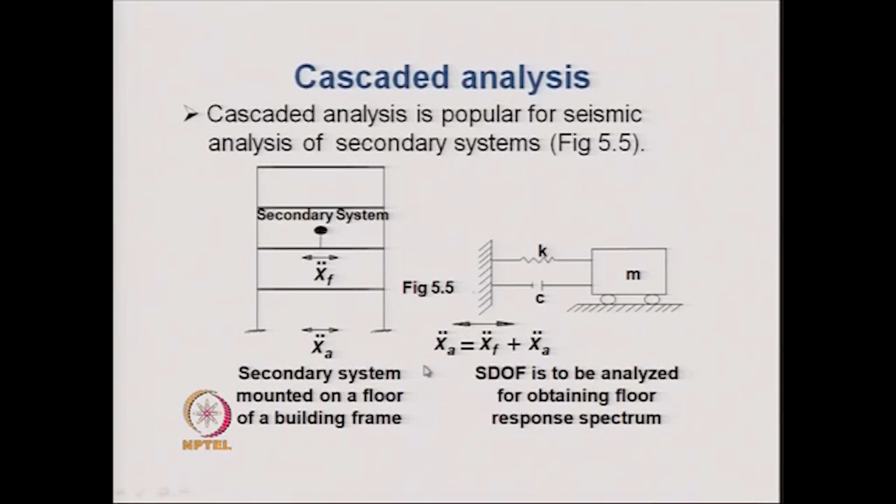So what is done is that first we remove the secondary system from the primary system, only retaining the mass of the secondary system attached to the primary system. We analyze it for the given ground acceleration, and the results of the analysis provide the time history of the acceleration at the floor level.

To this time history of acceleration, we add the ground time history of acceleration to obtain the absolute time history of the absolute acceleration. This time history of absolute acceleration then becomes input for the piping system, which is mounted on the floor.

We assume that the piping systems are attached to the floor in a way that one can assume the ends or supports of the piping system to be fixed. Thus, for a fixed end support, the acceleration at that support is the absolute acceleration of the floor.

By knowing the time history of the absolute acceleration of the floor, one can find out the response spectrum of the floor for the given absolute acceleration time history. So first the floor response spectrum is obtained from that time history, and once we get the response spectrum for the absolute acceleration, that response spectrum is inputted at the base of the piping system, and we carry out the usual response spectrum method of analysis that we have discussed.

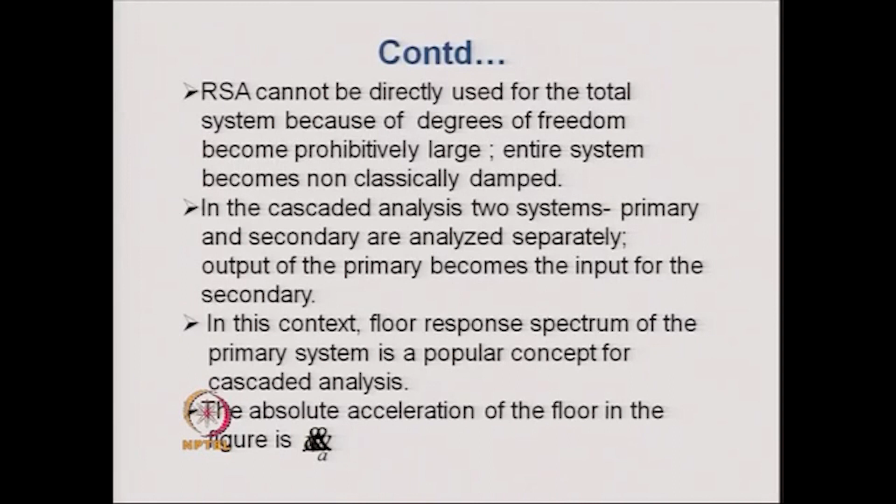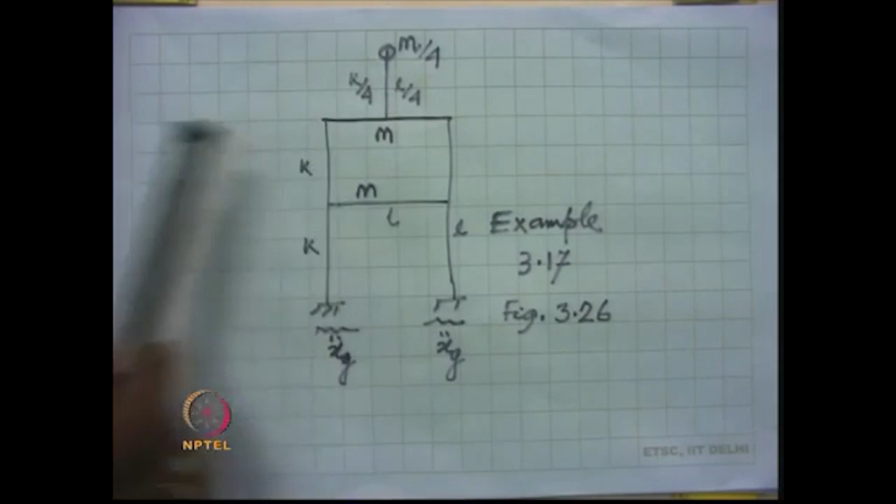An example problem is solved here to illustrate the use of the response spectrum method of analysis for secondary system. This is a building frame. In this building frame, we have a secondary system. The secondary system has a mass m by 4 and it has a length L by 4.

The stiffness is K by 4, whereas the main building has a stiffness of K, and this is the mass of the second floor. Damping for the secondary system is 2%, damping for the primary system is 5%.

This is an exercise problem given in chapter 3, that is the response analysis for the deterministic ground motion. In that chapter, this problem is given as an exercise problem to solve.

Now, for this system, for the specified ground acceleration, here the specified ground acceleration is taken as the El Centro ground excitation.

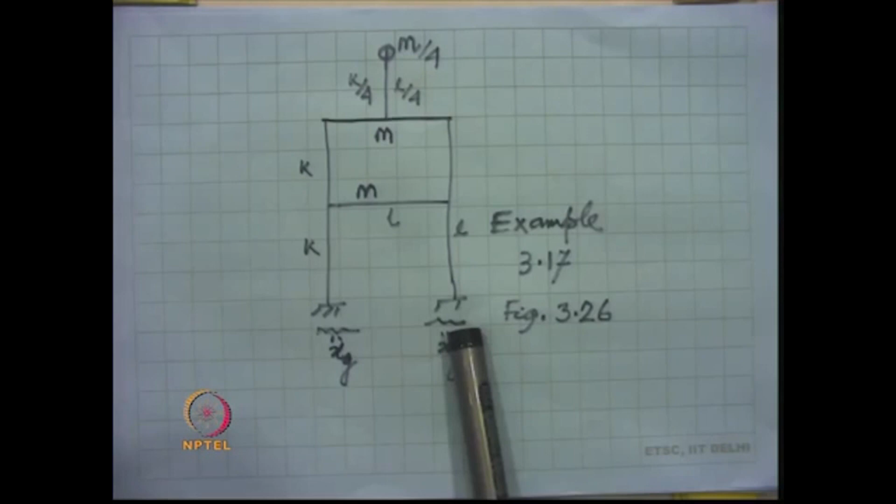We perform a time history analysis. We can perform the time history analysis either in the time domain or in the frequency domain, and find out the time history of the absolute acceleration for the top floor level.

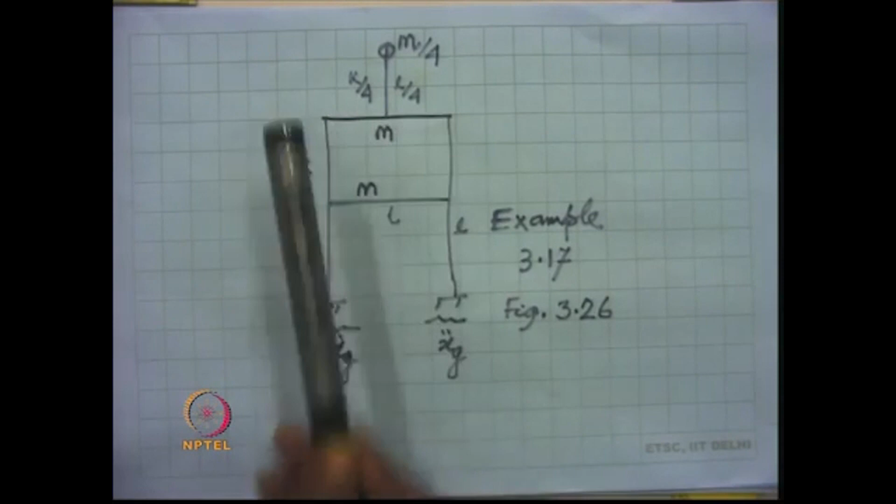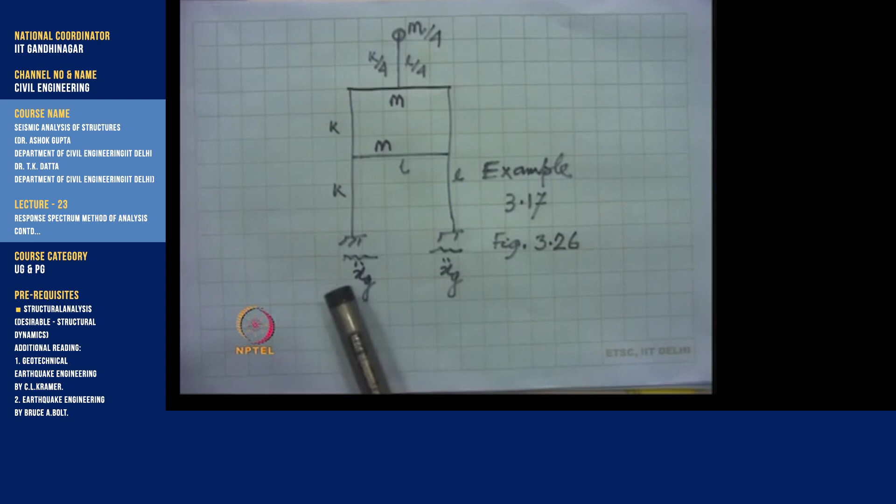And for that, first we find out the time history of the relative acceleration of the top floor, that is the relative acceleration with respect to the base, and to that we add the time history of the ground acceleration. So that provides a time history of the absolute acceleration of the top floor.

Then for that time history of absolute acceleration, we obtain a corresponding response spectrum of acceleration. How to obtain the response spectrum of acceleration, that we had discussed before, that is, we take a single degree of freedom system. The base or the support of the single degree of freedom system is subjected to the time history of the absolute acceleration that we have obtained.

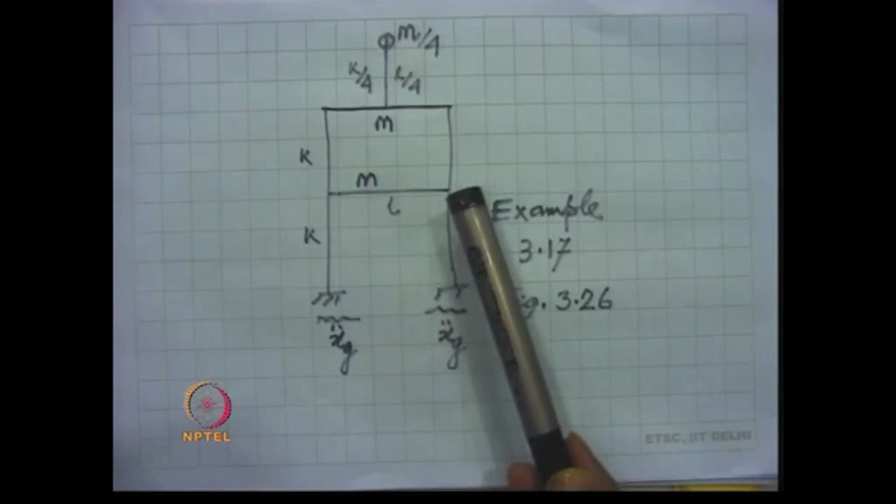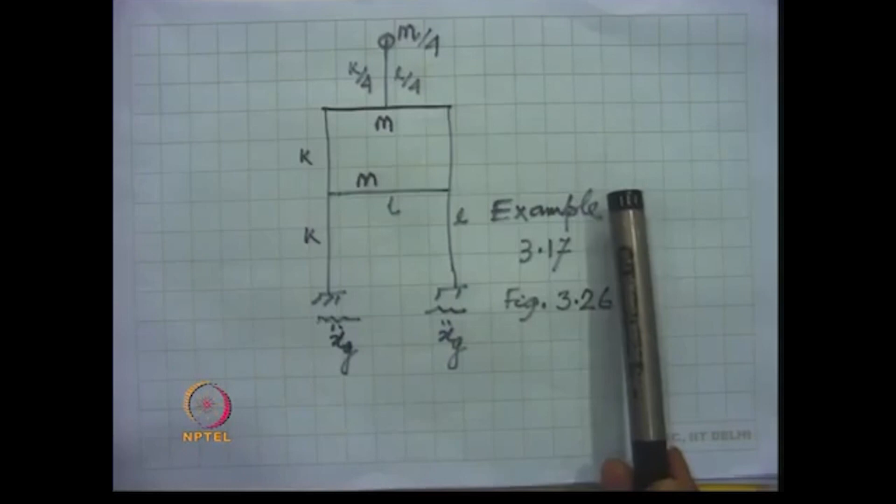Then for different frequencies for the single degree of freedom system, that is, by varying k and m, we can have different frequencies and corresponding different time periods. For that we can obtain the displacement response spectrum first. Then from the displacement response spectrum we derive the pseudo velocity spectrum, and from that we can derive the pseudo acceleration spectrum, or the acceleration spectrum that we generally use.

These response spectrums are obtained for the required damping, and in this case the damping is 2%, because the secondary system has a damping of 2%.

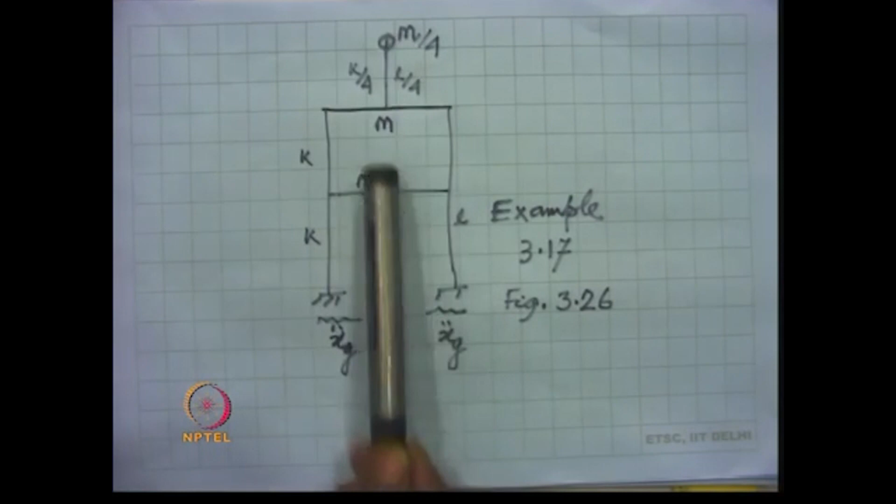So once we have the response spectrum of acceleration for 2% damping, then for this secondary system an excitation record acts at the base of the support, whose response spectrum is now known. Therefore the time period for this secondary system can be worked out with the help of the stiffness and the mass.

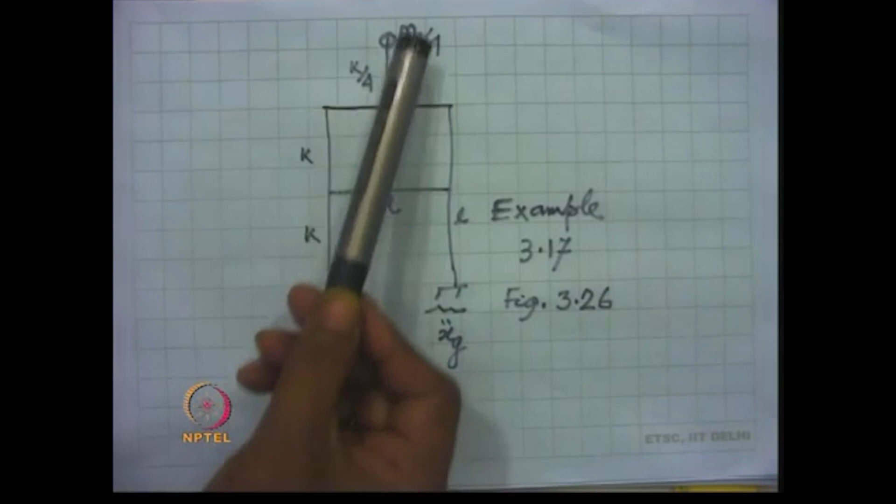Once we know the frequency of the secondary system, from that we can get the corresponding time period, and for that time period one can obtain the acceleration spectrum ordinate, and using that acceleration spectrum ordinate we can obtain the force that would be acting on this system.

Since it is a single degree of freedom system, we need to consider only one mode, so there will be only one static force acting onto the secondary system, and we can find out the bending moment, shear force, and the top displacement of the secondary system.

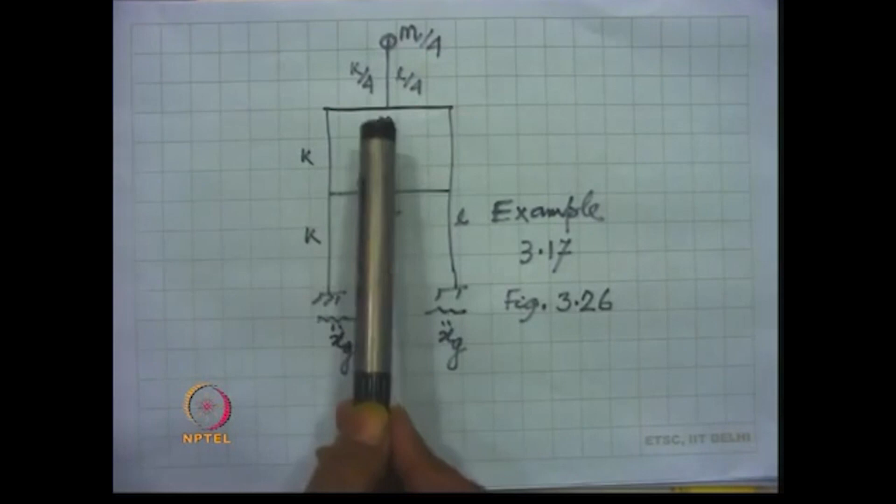This problem is made easy by providing only a 1 degree of freedom system. However, one can have a structure which is not a single degree of freedom system like this.

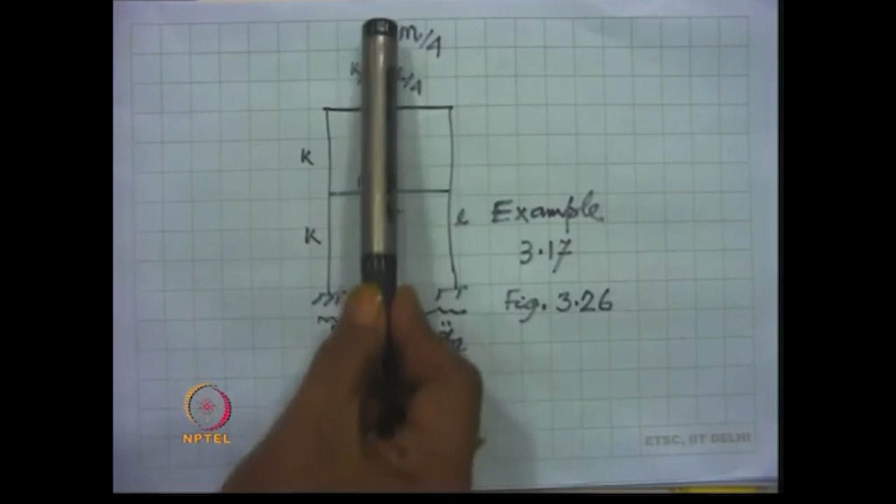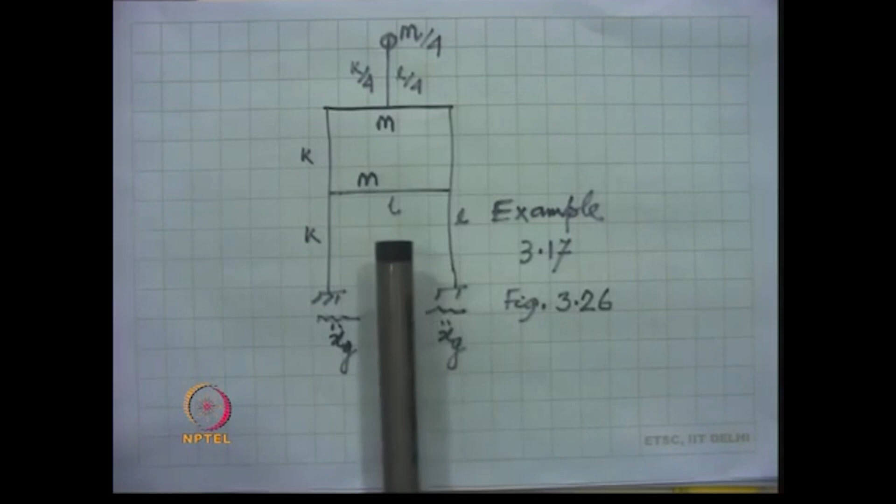In fact, there could be a piping system in which there could be 2, 3, or 4 supports, and in that case at all the supports we can assume that the same time history of absolute acceleration would be acting, for which the response spectrum we have obtained, and then carry out the usual response spectrum method of analysis for the piping system.

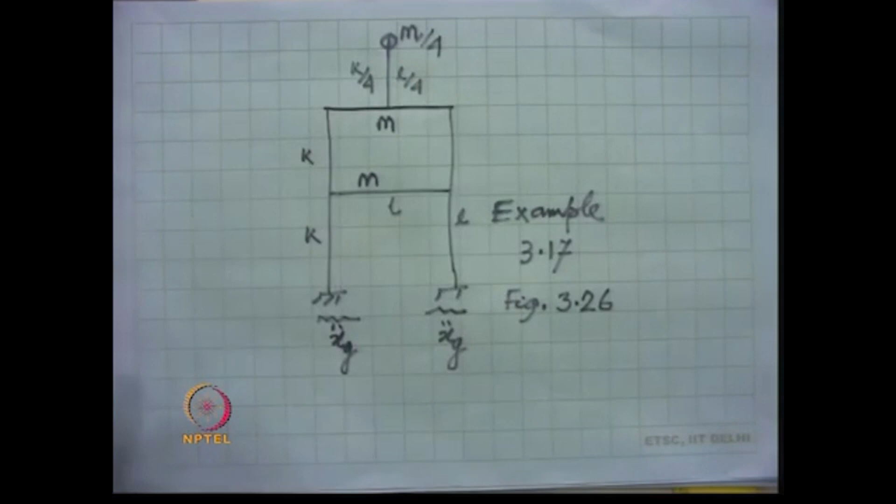The result for this problem is shown here. The time period of the secondary system was obtained as 0.811 second. The displacement, or floor displacement, response spectrum is given over here.

We can multiply the floor displacement response spectrum with omega square in order to get the pseudo acceleration response spectrum. Once we get the pseudo acceleration spectrum, then corresponding to this time period of 0.811 second, one can obtain the value of the spectral acceleration and multiply that spectral acceleration with the mass.

That would give the force acting on the top of the cantilever, resulting in a lateral displacement at the top and the corresponding base shear. The result that we obtained from the cascaded analysis was...

0.8635 meter as the deflection of the top of the cantilever, whereas a proper time history analysis for the entire structure, considering the secondary system included into the entire structure, makes it a composite primary-secondary system. We call it a PS system.

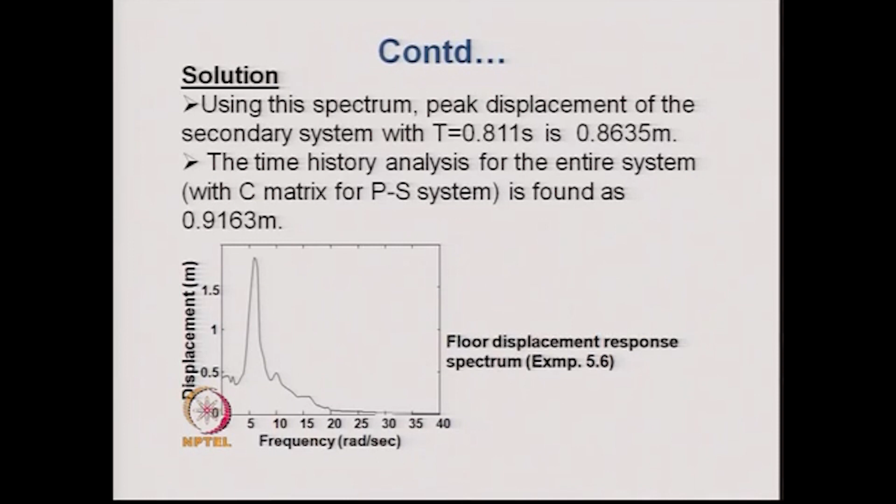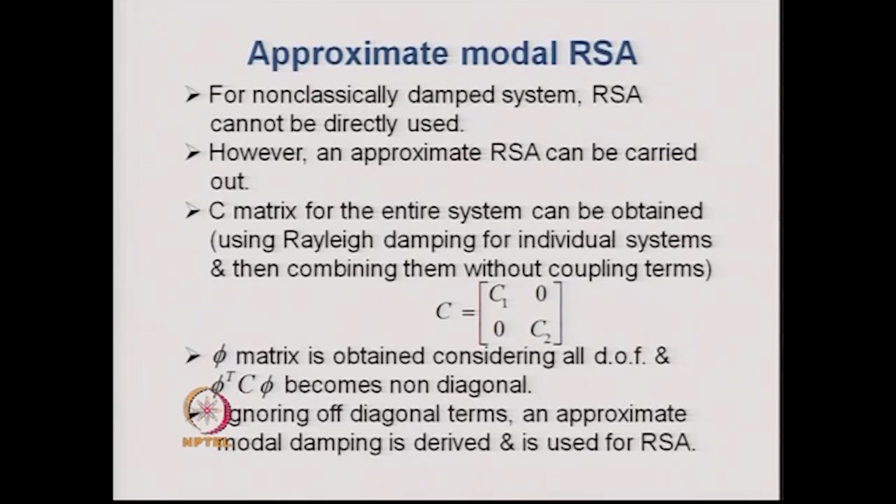Next, we consider the application of the response spectrum method of analysis for non-classically damped systems. The non-classically damped systems are ones in which we have a system like this, in which there is a main system, and in that main system, say we have a tower. Then this tower may be made of steel, this building is made of concrete—both of them have different damping.

So the construction of the C matrix for the composite system is to be obtained first. In this case, the C matrix is obtained by first obtaining the damping matrix for the primary structure, and separately obtaining the damping matrix for the secondary system.

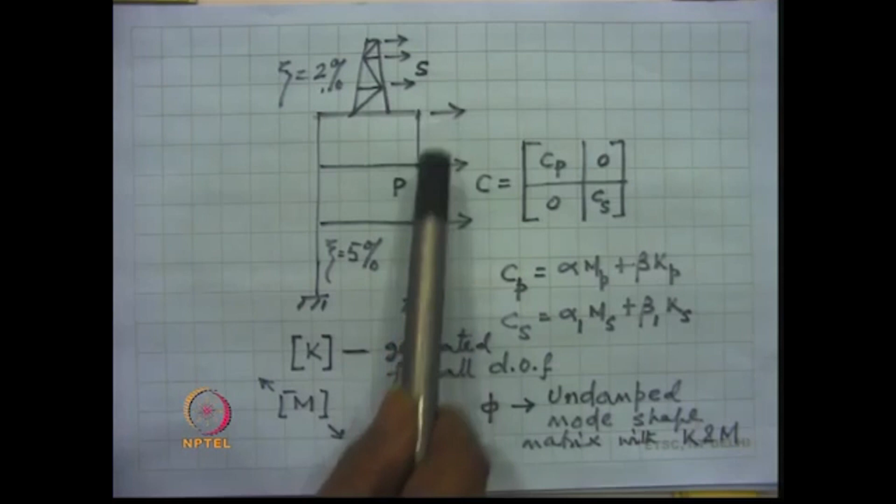Here say the main structure has 3 degrees of freedom. So we obtain the damping matrix corresponding to these 3 degrees of freedom by assuming it to be mass and stiffness proportional. So we first find out the frequencies of the primary system, and in that we completely decouple the secondary system. So from that we get the damping matrix after obtaining the values of alpha and beta.

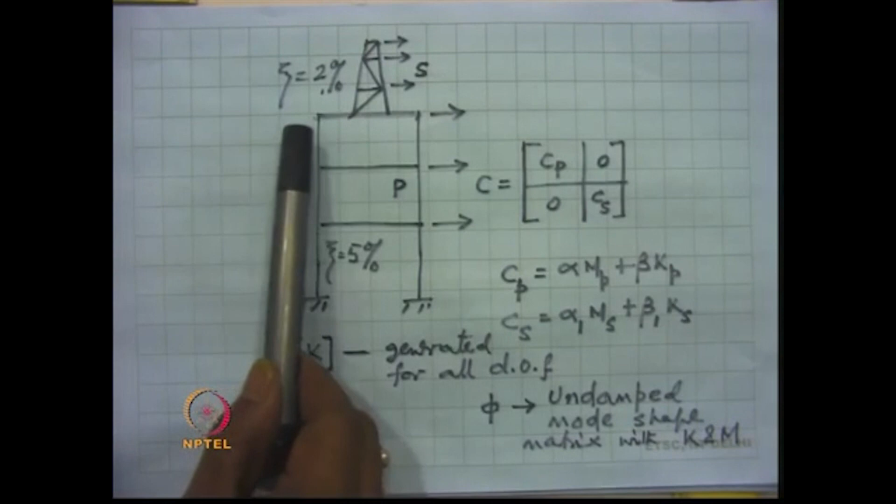Once we get this damping matrix for the primary system, we put it over here, and it will be a 3 by 3 matrix. Similarly, one can obtain the damping matrix for the secondary system, say it is also having 3 degrees of freedom. So using a modal damping ratio of 2%, we construct the CS matrix in the same fashion as we have done for the primary system, and this CS is the damping matrix for the secondary system.

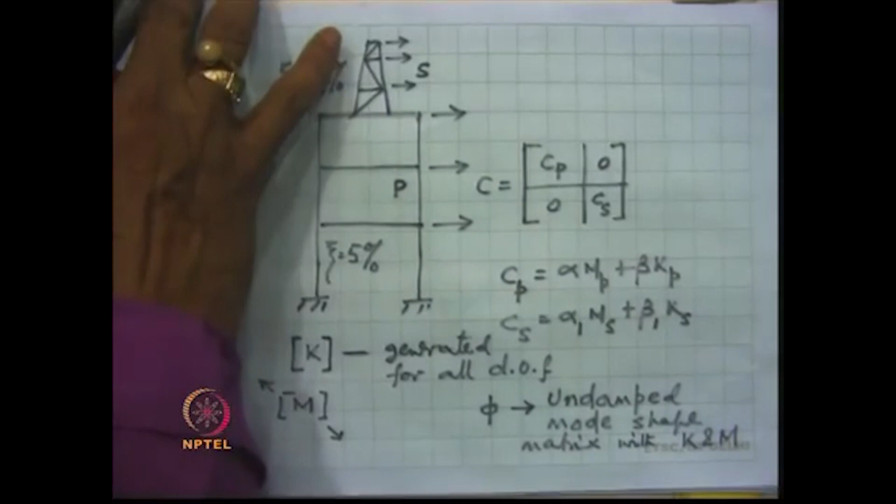The coupling between the primary system and the secondary system, that we set to 0 because that is not explicitly known. That is how one can construct a C matrix, and this C matrix is non-classically damped because we have got 2 types of damping in the system.

Once we get the damping matrix for the entire system, one can consider the entire system together, a system of 6 degrees of freedom. We write down the stiffness matrix corresponding to these 6 degrees of freedom, that becomes the K matrix. The mass matrix becomes a diagonal mass matrix having 6 masses. With the help of this mass matrix and stiffness matrix, we obtain the undamped mode shapes and frequencies with the help of K and M.

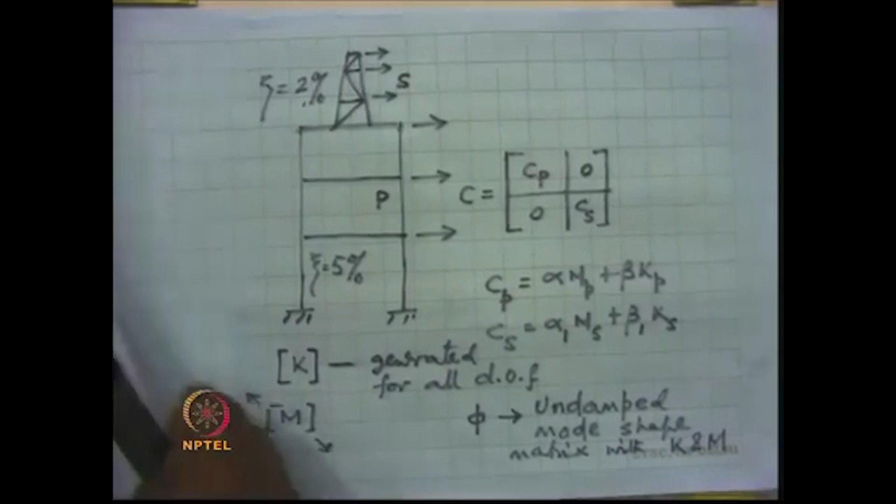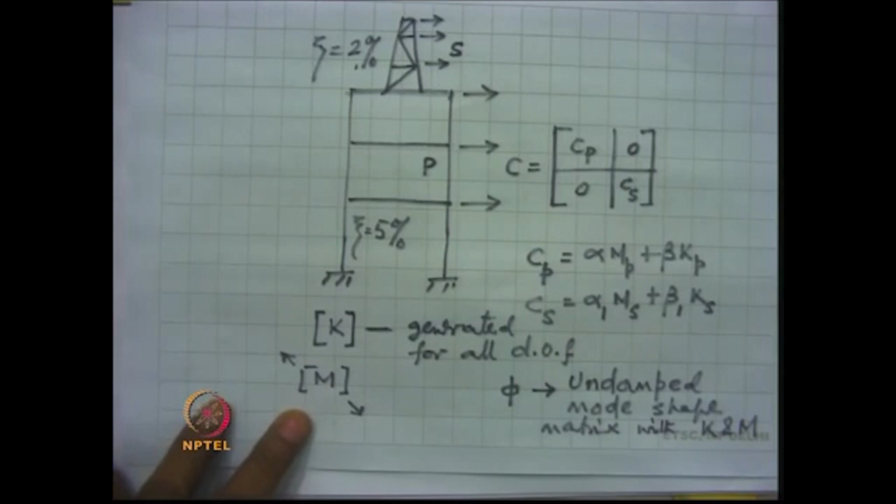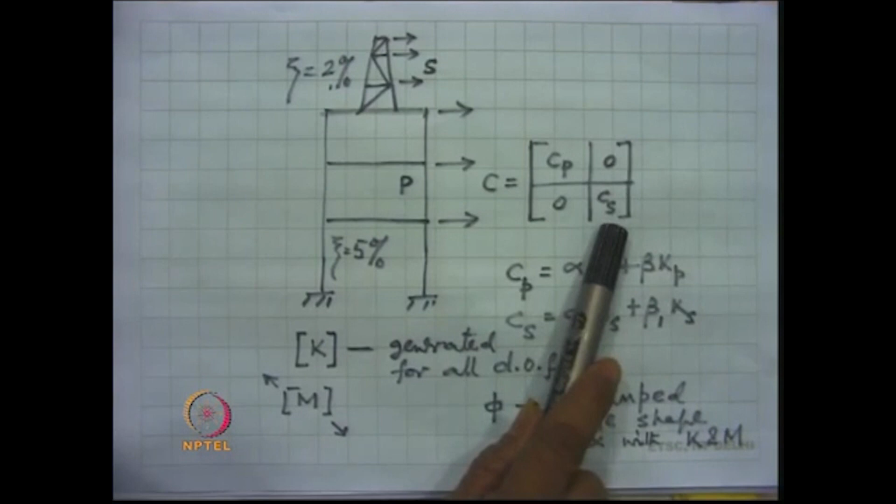Once we get these undamped frequencies and mode shapes, one can use decoupling, trying to decouple the equation of motion by writing phi transpose C phi, phi transpose K phi, and phi transpose M phi, which of course will be diagonal. Phi transpose C phi will not become a diagonal matrix. Note that the phi matrix will be 6 by 6, and since it is non-classically damped, phi transpose C phi will not be diagonal, there will be off-diagonal terms.

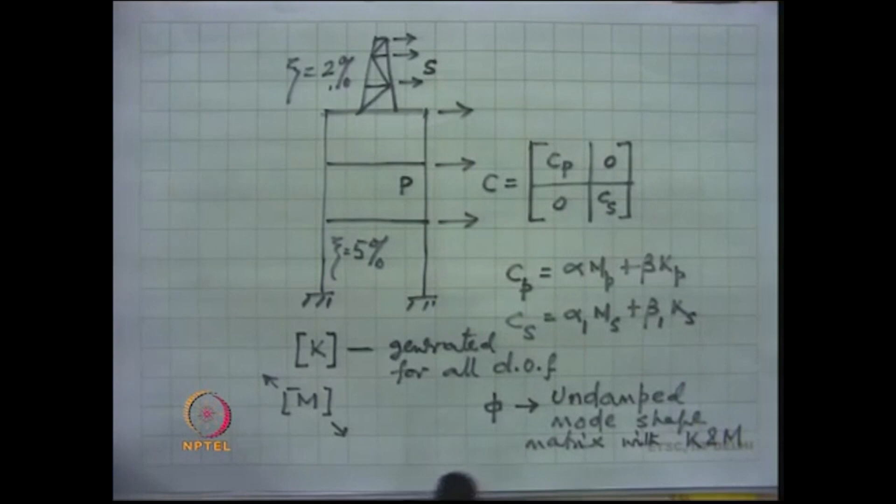By ignoring the off-diagonal terms, that is by diagonalizing the phi transpose C phi matrix, one can decouple the entire equation of motion, and from the diagonal terms of the damping matrix, one can obtain the modal damping ratios in each mode of vibration.

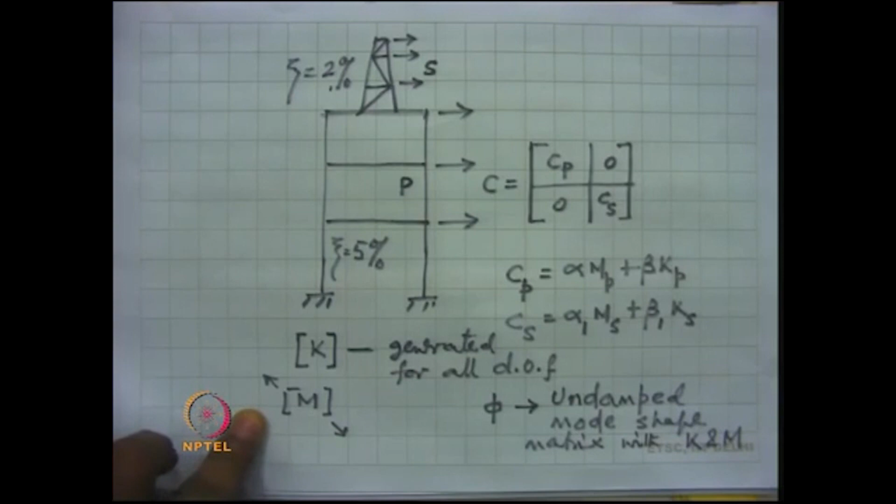Once we get that, one can use the usual response spectrum method of analysis, because we know the modal damping for each mode of vibration. Therefore, one can obtain the necessary spectral ordinates for acceleration for a given damping and given time period. Once we get the equivalent set of lateral forces in each mode of vibration, we can apply them and carry out the usual static analysis performed in the response spectrum method of analysis.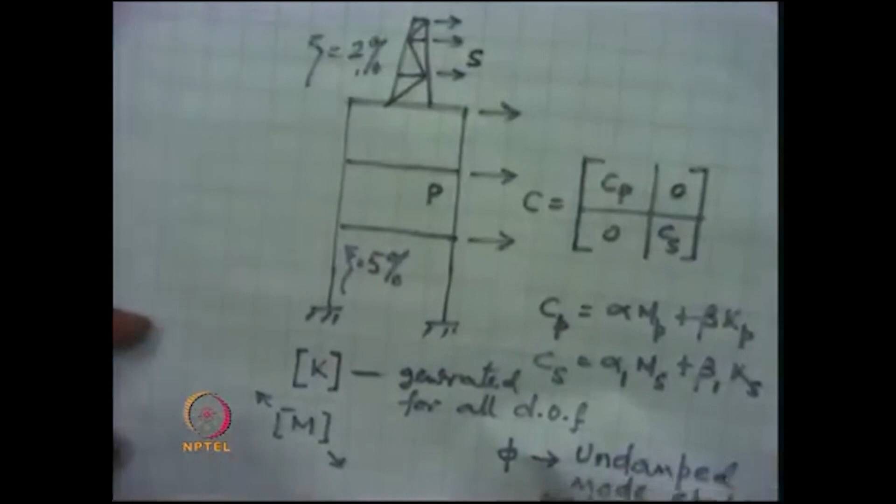Another problem of this type quite often encountered in structural engineering is the problem of soil-structure interaction, where the effect of the soil is replaced by springs and dashpots.

For example, here is a frame which has got 3 non-support degrees of freedom. At the supports, the springs indicate the soil stiffness and they indicate the soil damping. Generally, the vertical spring stiffnesses are made very high, so that effectively one can assume that the base cannot go down, that is, the base degree of freedom in the vertical direction is locked. We only permit the lateral movement of the bases.

Also, rotational springs can be introduced to take care of the rotation that can take place because of the flexibility of the foundation. So, in that case, the K matrix for the structure would be these 3 translations plus the 3 base translations plus these 3 rotations. That becomes the K matrix, and one can obtain this K matrix by the usual condensation procedure.

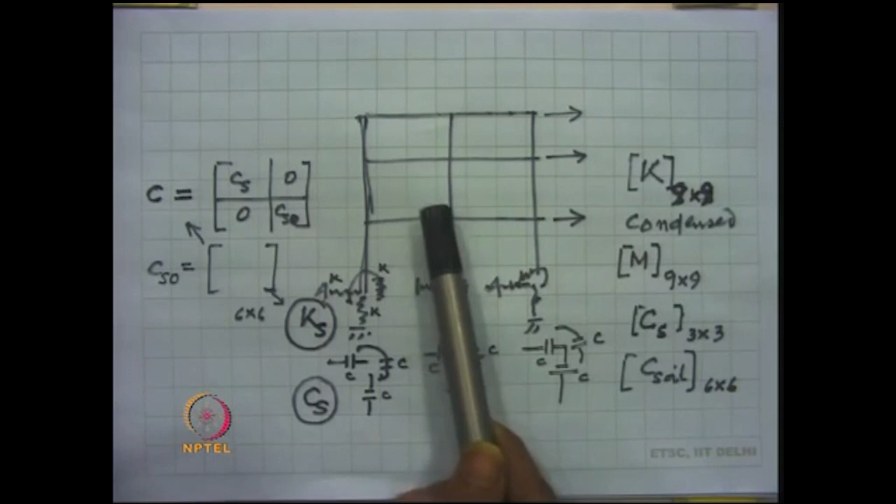Then the damping matrix for the entire system consists of 2 parts. One is the structure's damping matrix, which will be 3 by 3, and which can be obtained from the specified damping ratio for this structure. Say, if it is concrete, then it will be 5% damping. For that 5% damping, one can obtain the damping matrix for the superstructure.

The other part of the damping matrix is the soil, and this soil matrix can be obtained from the damping coefficient provided for the soil system. Generally, this soil damping matrix is a diagonal matrix. The coupling between the structure and soil damping matrices is again set to 0.

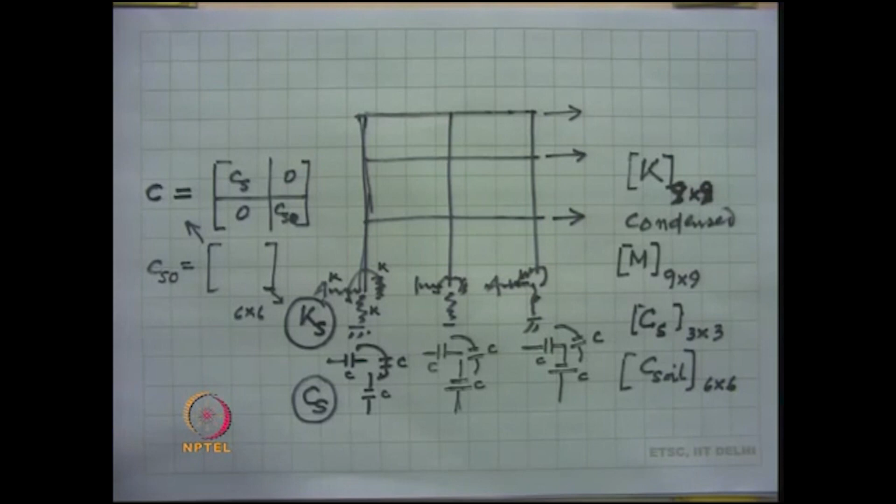Once we have this damping matrix, as before we can pre-multiply it with phi transpose and post-multiply it by phi, that is, phi transpose C phi is obtained, and phi transpose C phi is not generally a diagonal matrix. So we ignore the off-diagonal terms, and from the diagonal terms we obtain the modal damping in each mode of vibration, and then carry out the usual response spectrum method of analysis.

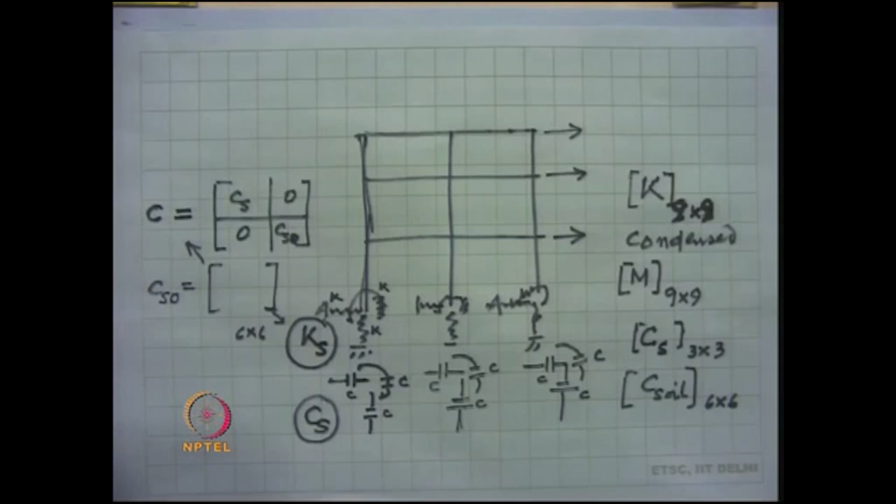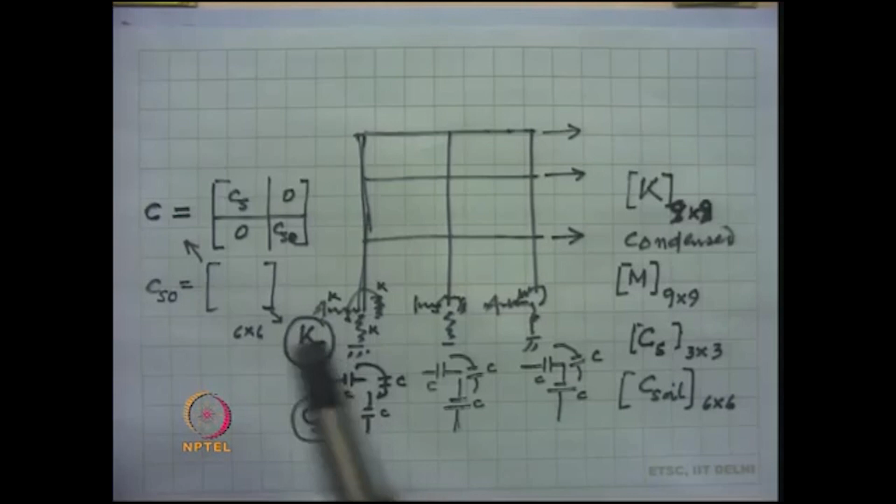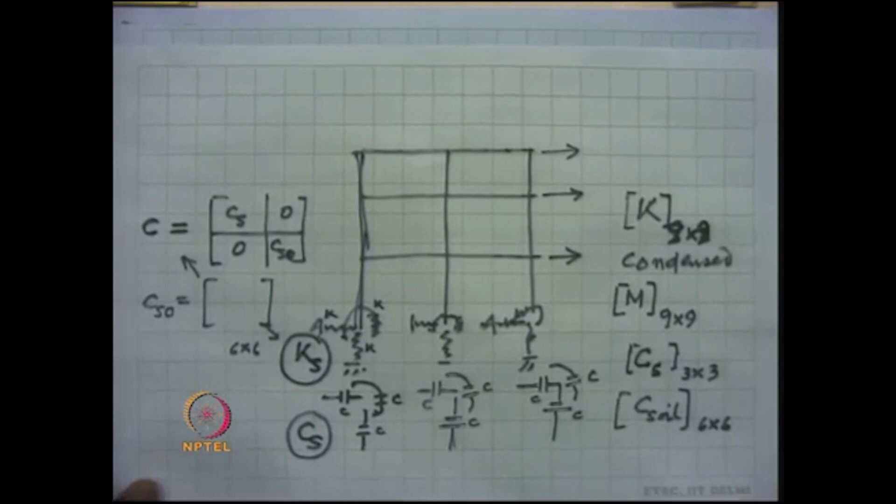Note that while performing the response spectrum method of analysis, we retain the springs at the bases, that is the lateral springs and the rotational springs, and then perform the static analysis corresponding to each mode of vibration with its equivalent static lateral load.

Next, we come to the seismic coefficient method. So far we were discussing the response spectrum method of analysis for non-classically damped systems, classically damped systems, multi-support excitation, single support excitation, and how we perform the response spectrum method for cascaded systems. Now we discuss another very popular method for obtaining design forces in structures for earthquakes, known as the seismic coefficient method.

Seismic coefficient method also prescribes a set of equivalent static lateral loads, applied onto the structure, then the structure is analyzed statically to find its responses, and those responses are assumed equal to the maximum forces that the structure would have experienced if the same earthquake for which the response spectrum was constructed had been applied.

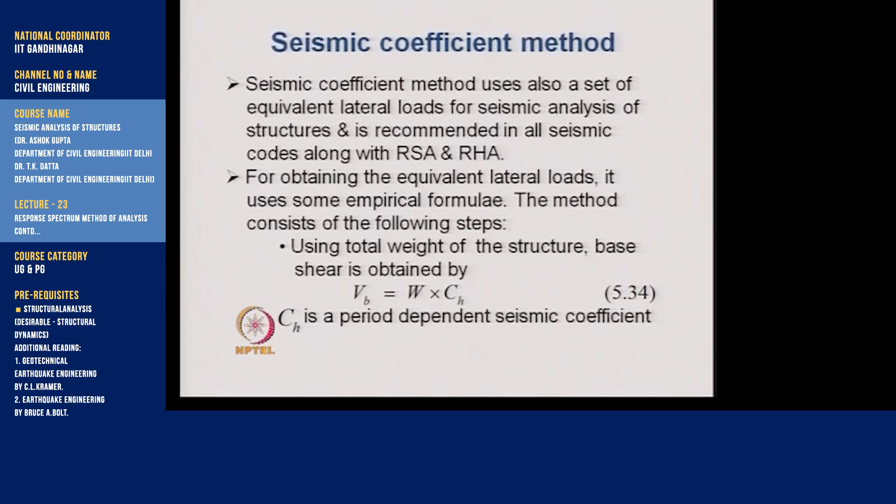Note that the response spectrum of acceleration can also be used to obtain the seismic coefficient, which we will discuss a little later. However, it is not necessary that the seismic coefficient is extracted from the response spectrum or acceleration response spectrum of the earthquake; sometimes the seismic coefficient is somewhat different from the coefficient we obtain from the response spectrum.

So in those cases, both the response spectrum and the seismic coefficient values for different time periods are prescribed. In most codes of practice, both the response spectrum method and the seismic coefficient method of analysis are prescribed for earthquake analysis and design of structures.

In fact, the seismic coefficient method is more popular compared to the response spectrum method because it is purely a static analysis. We do not have to even obtain the time period or frequency of the structure and the mode shapes of the structure in this case.

The time period of the structure is obtained with the help of some empirical formula, and the mode shape or the distribution of load along the height of the structure is also obtained with the help of some empirical recommendation. Therefore, we do not require the mode shape for the structure.

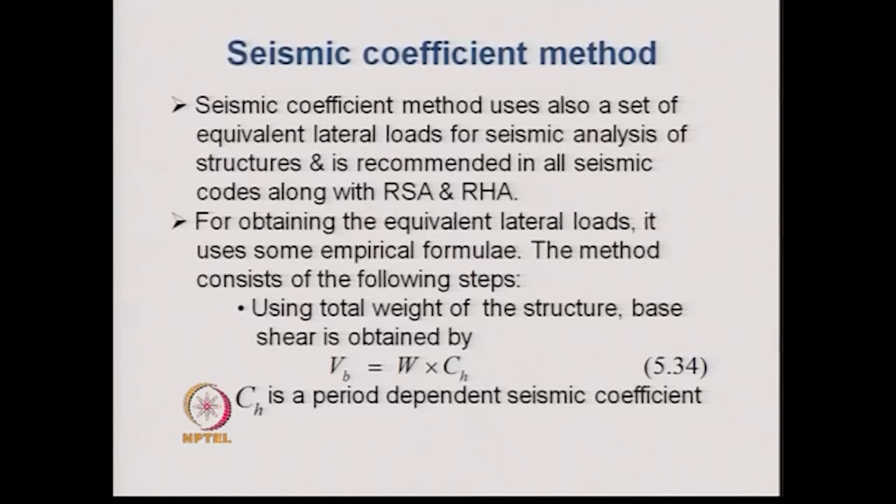Once we get the base shear, it is distributed as a set of lateral forces along the height of the structure. For obtaining these loads at different floor levels, formula 5.35 is used, where we multiply Vb by a function of the height of the floor, Fhi, which bears a resemblance to the fundamental mode of the structure, though they are not the same.

Thus, the loads at different floor levels Fi that we obtain from this formula, if added together, will finally be equal to Vb, the base shear.

After obtaining the force Fi for different floors, this force is applied to the structure statically to obtain the values of internal forces in different members, and these forces may be combined with other forces such as dead load or live load, to obtain the design forces for individual members of the structure.

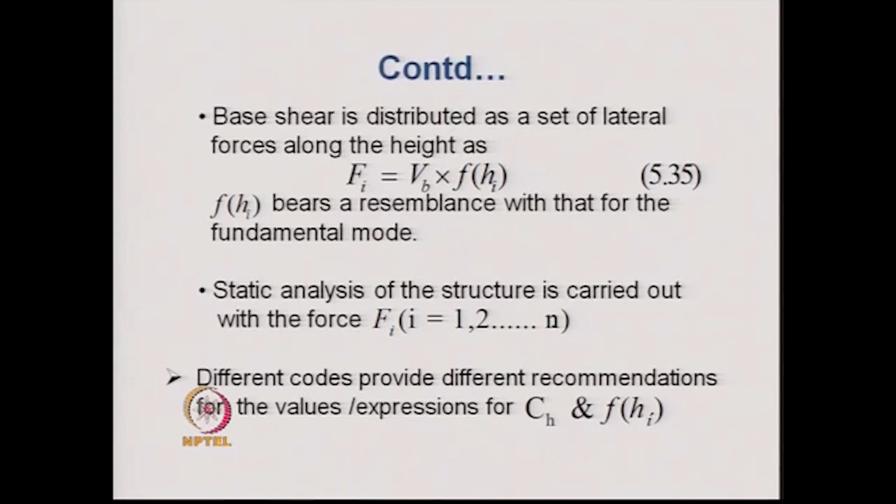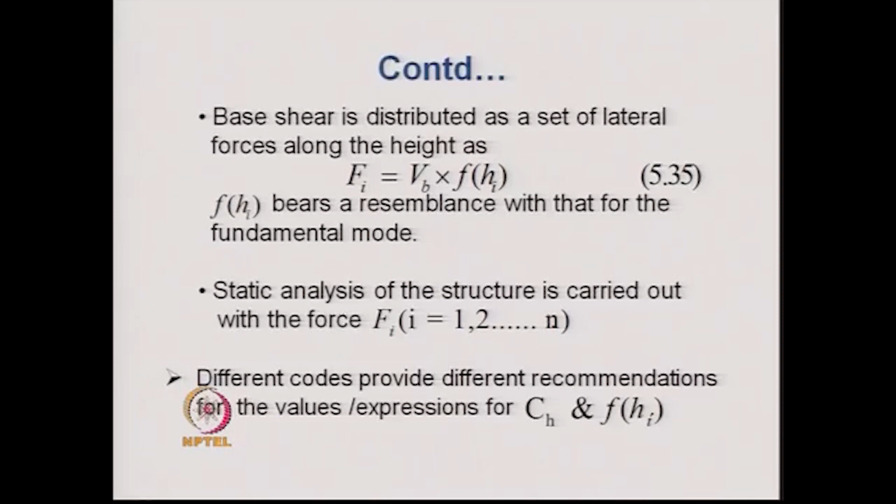Different codes provide different recommendations for the values or expressions of CH and f of HI. The distributional lateral force given in most codes cannot be fully justified from the theoretical point of view, but some kind of justification can be put forward for this distribution.

If we look at the first mode lateral load in the case of response spectrum method of analysis, it will be like this: the mode participation factor for the first mode is rho 1, Wj is the weight of the jth floor, corresponding to that there is a mode shape coefficient in the first mode, and that gets multiplied by SA1 by G, the spectral acceleration for the first mode, normalized with respect to G, so that it finally becomes mass times acceleration. W by G becomes the mass, and mass times acceleration becomes the force.

So this is a typical lateral force that we obtain in each mode of vibration in the response spectrum method of analysis. Now, if we concentrate only on the first mode of vibration, then the spectral acceleration, the mode shape, and the mode participation factor all correspond to the first mode only. With the help of this formula, one can find out the force at different floor levels J.

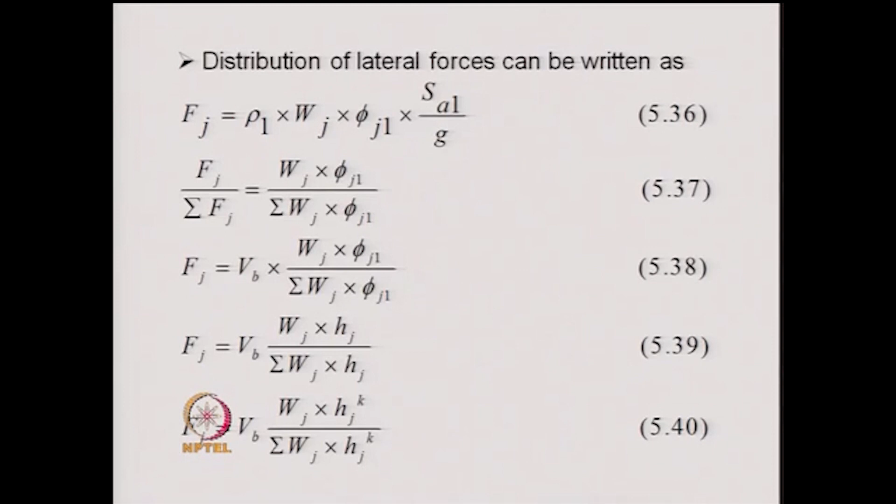Next, the formula used for calculating the base shear can also be justified to some extent from the theoretical point of view. If we look at the expression for the base shear in any particular mode, this is the sum of the lateral forces obtained at different floor levels in the ith mode, which in turn can be written in this particular fashion, as we have just discussed.

Here, lambda I is the ith mode participation factor, and SAI denotes the spectral acceleration corresponding to the ith mode. Now this VBI can be written as WIE into SAI by G.

WIE is called the effective weight or effective modal weight for the structure, and this is nothing but the sum of Wj phi jI multiplied by lambda I. So this is not a summation, this is Wj multiplied by phi jI multiplied by lambda I, that gives WiE, the effective modal weight in the ith mode.

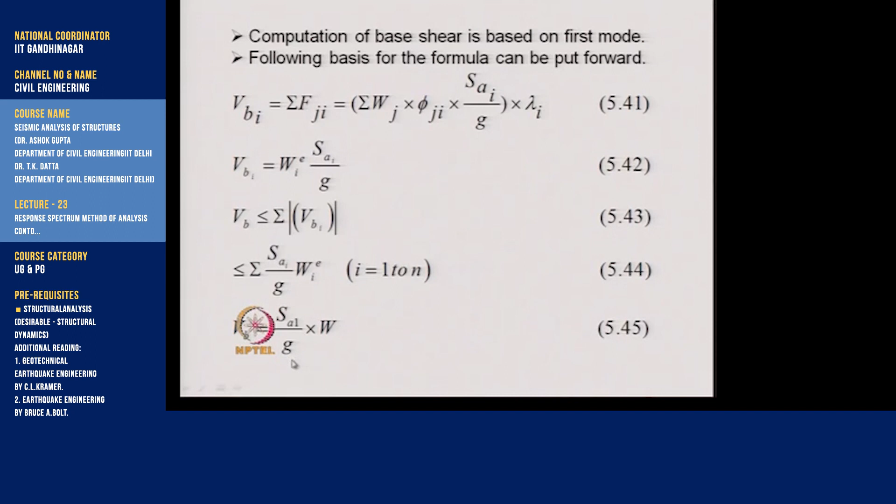So the base shear can now be written as VB equals SA1 by G multiplied by W, and the seismic coefficient method prescribes the value of VB to be equal to W multiplied by a seismic coefficient. Now if the seismic coefficient happens to be equal to SA1 by G, then we see that the VB used in the seismic coefficient method is nothing but the base shear we obtain for the structure by considering only the first mode.

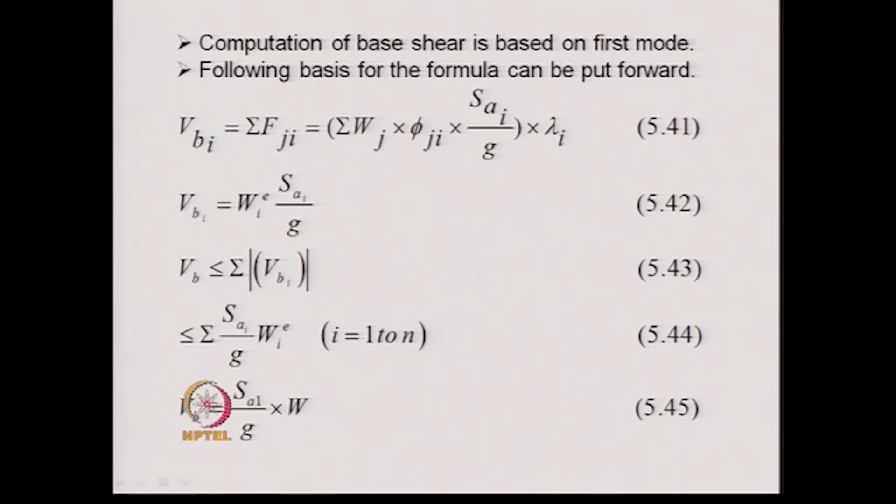So that is how one can justify the calculation of base shear for the seismic coefficient method, and in many codes of practice the seismic coefficient CH and spectral acceleration are the same. As a result, the base shear calculation obtained in the seismic coefficient method is equivalent to the first mode base shear in the response spectrum method of analysis.

At this stage we can summarize some of the important issues related to the equivalent lateral load analysis of structures for earthquake, before we go to the next section of our discussion, that is the seismic code provisions.

First, we discussed the response spectrum method of analysis. We said it is a unique concept in earthquake engineering, developed specifically for designing structures for earthquake. This is partly dynamic and partly static, because the first part requires evaluation of the mode shapes and frequencies, which is the dynamic analysis of the structure, and once we have the mode shapes and frequencies, the rest is a static part.

The equivalent static load obtained in each mode of vibration is exact for a single point excitation system, and it can be obtained from the fundamental equations of the multi-degree of freedom system.

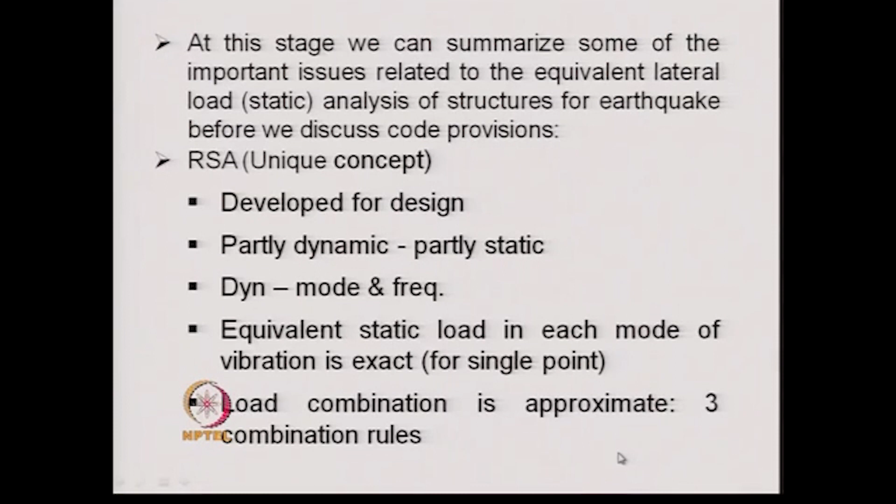However, when we combine the static load effects in each mode of vibration to find the total response, the load combination is approximate, and there are three combination rules: ABSUM, SRSS, and CQC. The ABSUM rule provides a conservative estimate of the responses, and the SRSS rule provides a better result in case of well separated frequencies of the structure.

When we have closely spaced frequencies, then in place of SRSS we use the CQC rule, in which the modal correlation effect is taken into consideration.

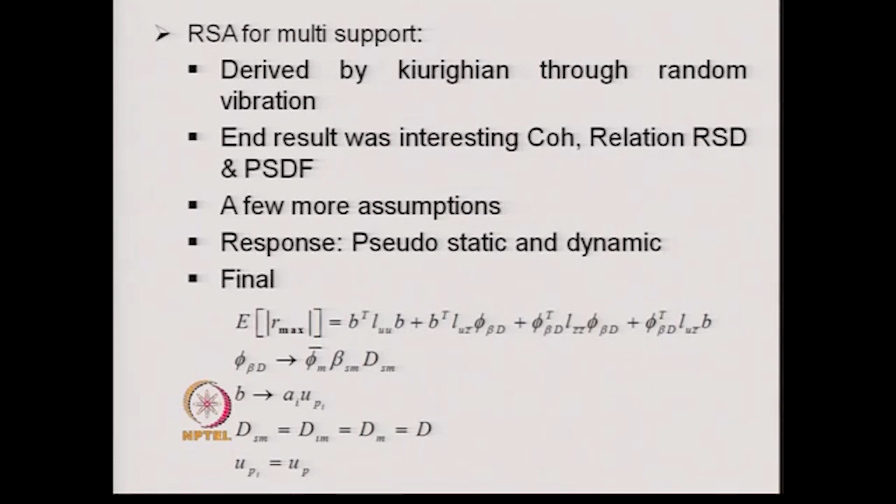After that, we discussed the response spectrum method of analysis extended for multi-support excitation. It was first derived by Kiureghian through the random vibration approach, but the end result was very interesting. It requires additionally a coherence function and the relationship between the response spectrum of displacement and the power spectral density function.

Then we discussed how the response spectrum method of analysis can be utilized for the secondary system, and how it can be utilized for non-classically damped systems.

After that, we discussed the basis of the seismic coefficient method of analysis, as it is quite popular with the earthquake engineering community, and it has been observed that the seismic coefficient method is essentially based on the first mode response. However, the mode shape of the first mode is approximated by different formulas, and the time period of the first mode is calculated by some empirical formula.